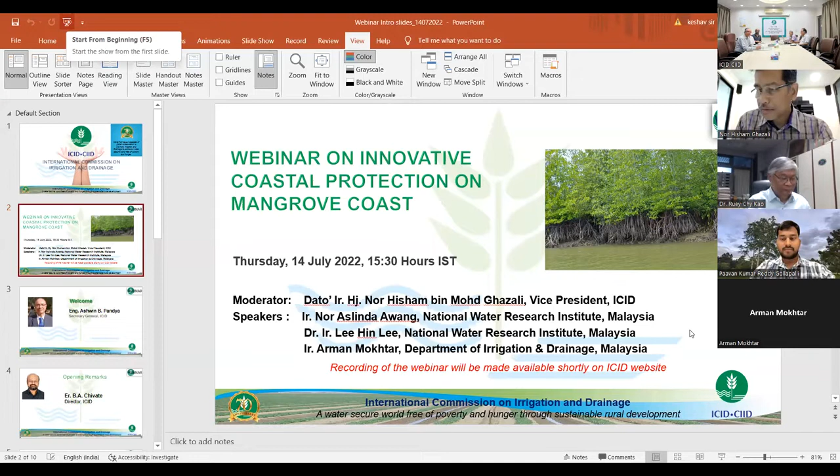So welcome to the ICID webinar on innovative coastal protection on mangrove coasts. This is a very important and very relevant webinar, especially when we are fighting with the climate change and the related issues of coastal erosion, as well as the disasters like tsunami, etc.

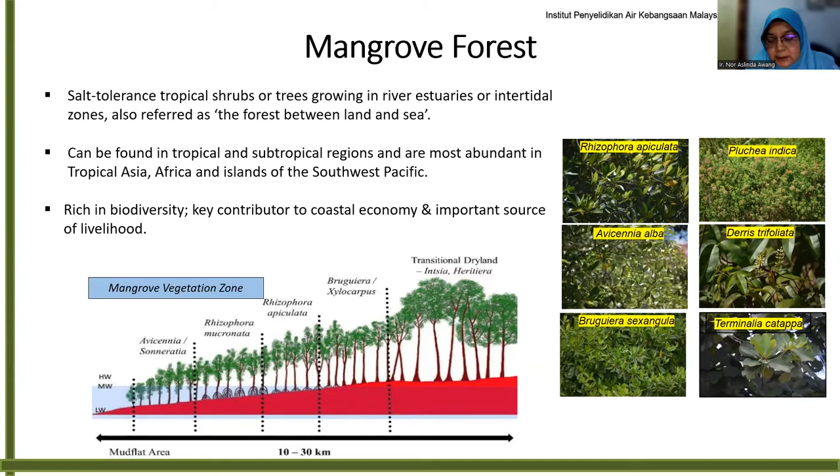Mangrove forest is salt tolerant tropical shrubs and trees growing in rivers, estuaries, and the intertidal zone, also referred to as forests between land and sea. They can be found in tropical and subtropical regions and are most abundant in tropical Asia, Africa, and islands in the Southwest Pacific. They are rich in biodiversity, a key contributor to the coastal economy and an important source of livelihood. The figures show the mangrove vegetation zone where different species of mangrove normally grow, and the most common are Rhizophora, Avicennia, and Bruguiera.

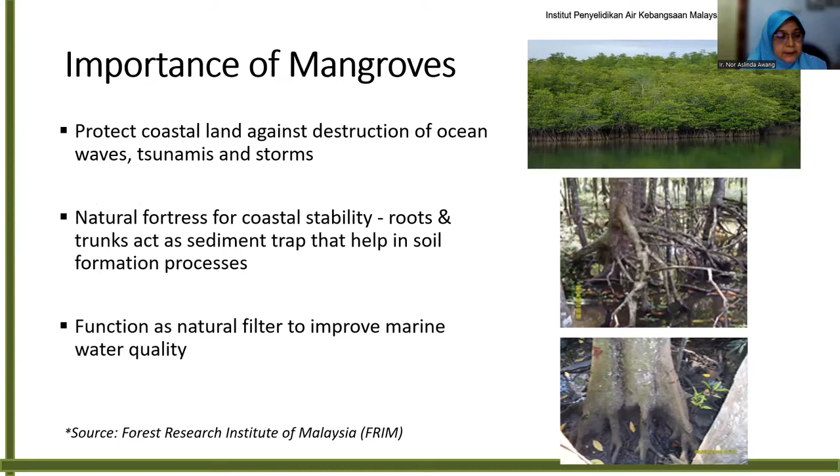And the importance of mangrove: they protect coastal land against destruction from ocean waves, tsunami, and storms. They are natural fortresses for coastal stability because their roots and trunks can act as sediment traps and help in soil formation. They also function as a natural filter to improve marine water quality. They play a unique role in ecology and biology, such as supply of timber and water storage, and provide nurseries and habitat for fisheries, prawns, and many species. And they also promote ecotourism.

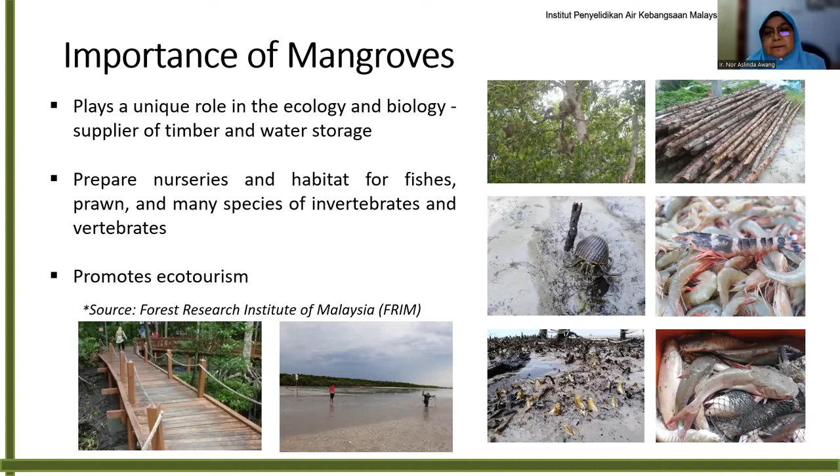Another important point is they are a significant carbon sink in the coastal environment, storing the highest biomass carbon compared to other forest types around the world. So in monetary value, mangrove forest conservation could provide a profit of USD 300,000 per kilometer. And another study found that mangrove forest can provide ecosystem services valued at USD 200,000 to 900,000 per hectare, depending on location.

A socioeconomic study in Salabat Mudflat Nature Reserve, Sarawak estimated income from fisheries of more than 56,000 USD per month. And the area, 199 hectares of mangrove forest there, can generate approximately 3,400 USD per hectare. Another study on economic evaluation at Kuala Perlis Forest Reserve in Peninsular Malaysia estimated income of approximately 75,800 USD per hectare, and the estimated total value of the forest is about 3.2 million USD for 42 hectares.

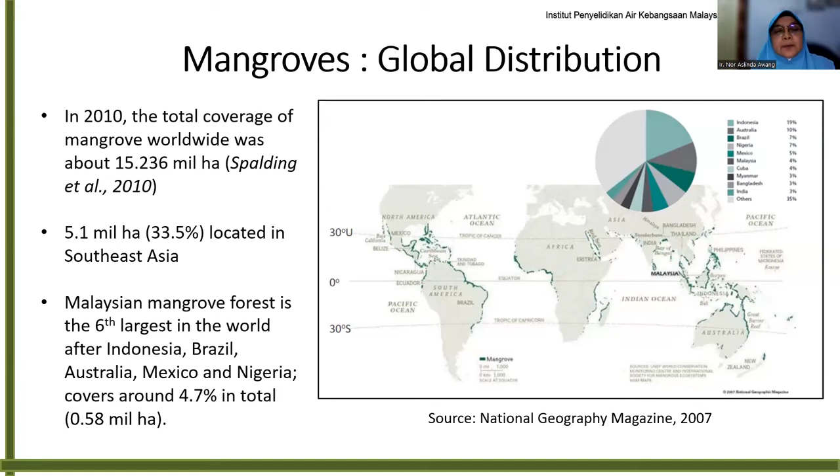Sorry. Okay, global distribution. In 2010, Spalding et al. found that the total coverage of mangrove worldwide is about 15.2 million hectares, and 5.1 million hectares is located in Southeast Asia. Malaysian mangrove forest is the 6th largest in the world after Indonesia, Brazil, Australia, Mexico, and Nigeria. It's about 0.58 million hectares.

So the latest study in 2017, by Hamdan from the Forest Research Institute of Malaysia, using satellite remote sensing, found that we now have 629,000 hectares, where 18% is in Peninsular Malaysia, Sarawak is about 22%, and another 60% is in Sabah.

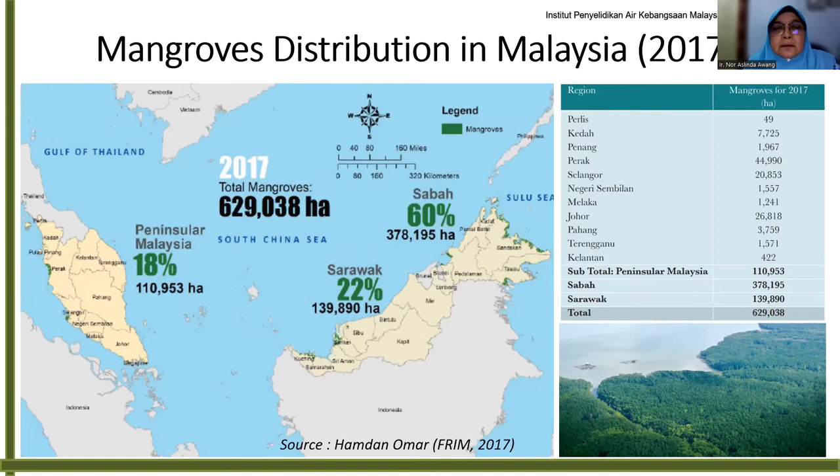So, threats and challenges. The global mangrove has experienced net loss as a result of human activities and nature. According to FAO, the Food and Agriculture Organization of the United Nations, the global mangrove area decreased by 0.5 million hectares from 1990 to 2010. The human activities are such as land conversion, over-harvesting, pollution, and sedimentation. In Malaysia, land conversion is the main threat.

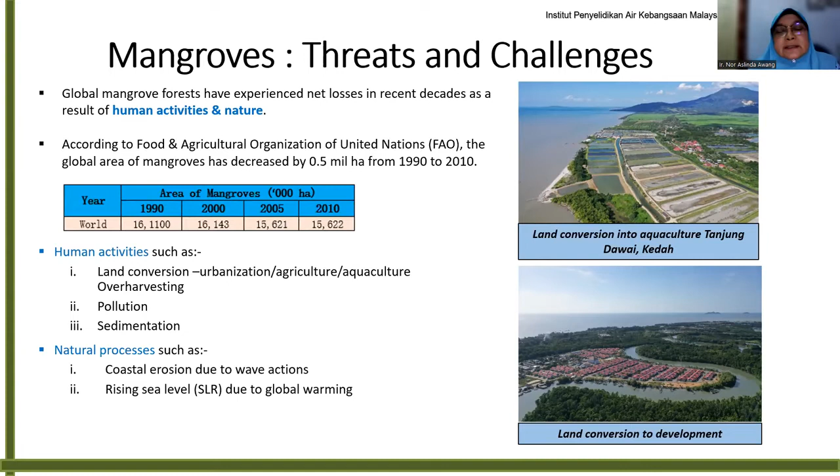The natural processes are such as coastal erosion and rising sea level. For coastal erosion in Malaysia, in 2015 the National Coastal Erosion Study was revised, and the total length now is about 8,840 kilometers, because they include the islands now, about 40 islands around Malaysia.

The erosion rate was categorized into 3 categories. Category 1 is critical or high, with an erosion rate of more than 4 meters per year. Category 2 is significant, with an erosion rate of 1 to 3.9 meters per year, and category 3 is acceptable, with an erosion rate of less than 1 meter per year.

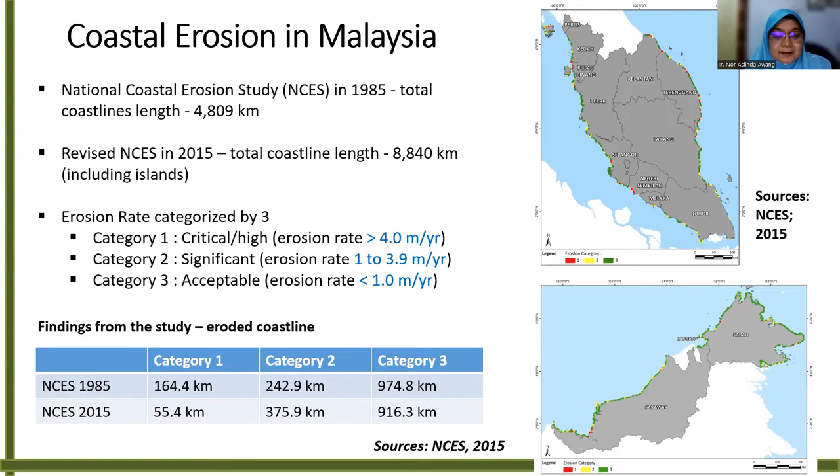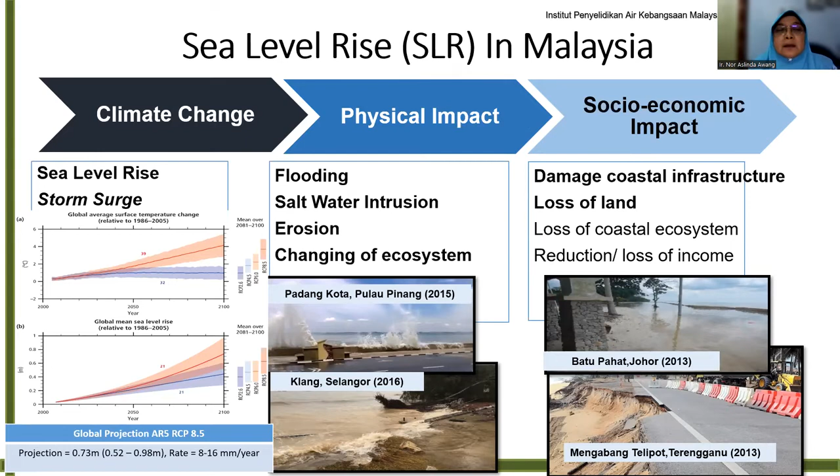We also studied the inundation area in Port Klang to see the impact of sea level rise on mangrove areas. Sea level rise causes changes in inundation duration, level, frequency, velocity, wave height, type of sediment, and salinity level, which may lead to plant death.

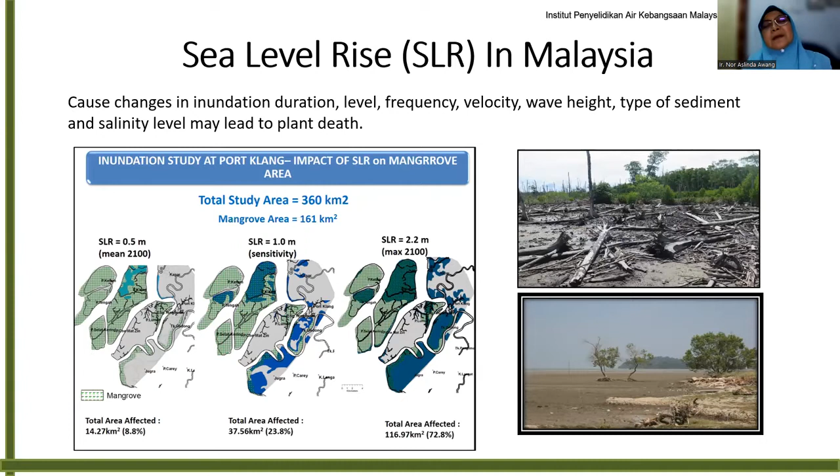A sea level rise of 0.5 meter can affect about 14 square kilometers of mangrove, while a sea level rise of 1 meter will affect about 37.5 square kilometers. If we take the maximum value of sea level rise of 2.2 meters, the total affected will be 116 square kilometers. This shows that mangrove area will decrease in the future.

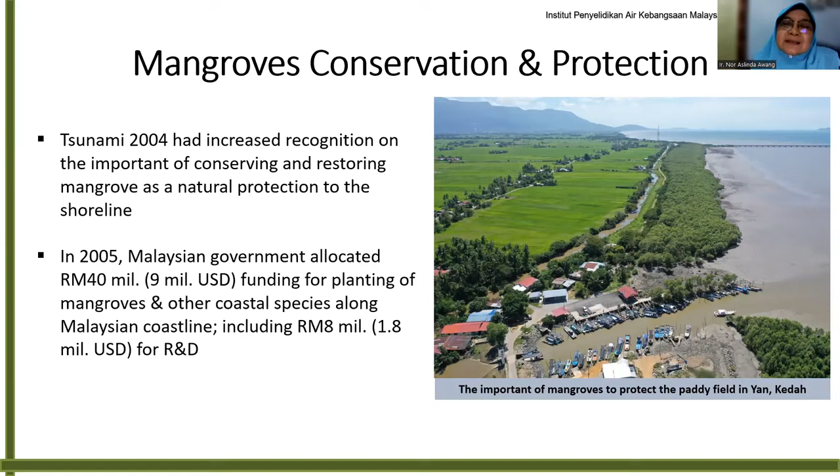In the effort of mangrove conservation, the 2004 tsunami increased recognition of the importance of conserving and restoring mangrove as natural shoreline protection. In 2005, the Malaysian government allocated about 9 million USD for planting mangrove and other coastal species along the coastline, with 1.8 million USD for R&D. For other coastal species, because of the sandy coast, we also have to protect them, so we plant casuarina and other species suitable for that area.

Mangrove planting needs knowledge and skills. Not all planting projects are successful. We need information on soil condition, monsoon season, and hydrodynamic parameters, which is crucial before planting takes place. The best planting time is after the monsoon, in areas with low wave and current impact.

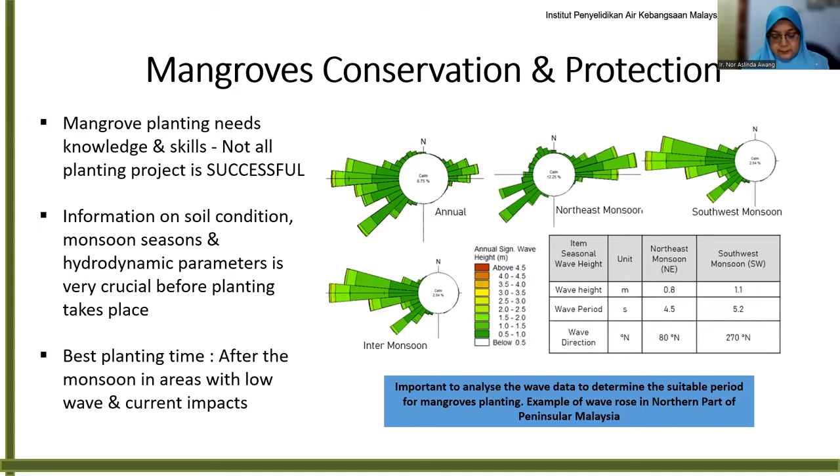So Dr. Lee will speak more on the R&D which we have carried out for mangrove conservation later. So other than R&D, we also built more nurseries to enhance the seedling productivity, and in some problematic areas, we did mangrove replanting using innovative techniques such as COMMAT and COMPILO.

Aslinda, I will allow you 2 minutes more to conclude. Okay, just 2 slides more. Okay.

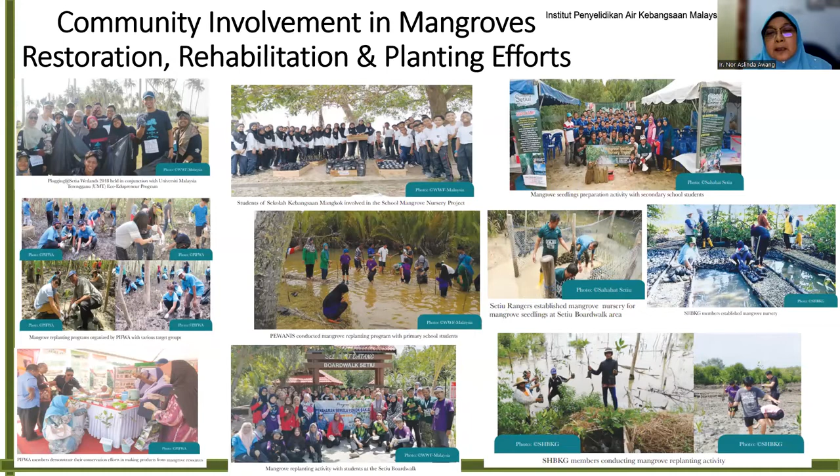Community involvement in mangrove restoration, rehabilitation and planting effort is also crucial in conservation of mangrove. So we involve the school children, private companies, government officers, and also villagers to participate in this planting program. And the NGOs have their task in the effort to conserve the mangrove. They help these awareness programs, such as the Malaysian Nature Society.

They show the children how to do the nursery, and Global Environmental Center in planting the mangrove, and rural citizens in Kedah did a lot of awareness for school children. Wetlands International created nurseries for seedlings, and also World Wildlife Fund in Terengganu, they have a lot of programs to encourage school children in replanting of mangrove. This PIFWA is Penang Inshore Fishermen Welfare Association.

They have contacts from private entities and also foreign visitors who have interest in preserving mangrove, and they invite all foreigners to come and help them to plant the mangrove. So with that, thank you.

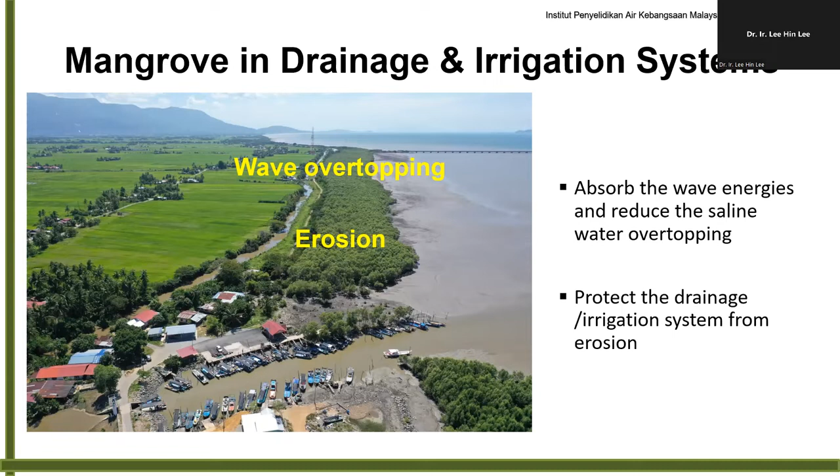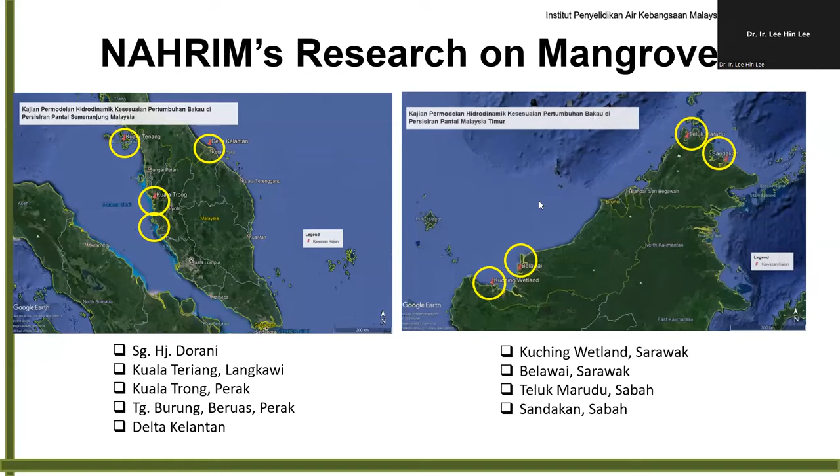Okay. In general, we have carried out the R&D research, and also we carry out some consultancy jobs. So from all the R&D and the consultancy research, there are a few things when we talk about planting the mangrove. If we want to make sure that mangrove can be sustained in good condition, mangrove likes to be in conditions where the current speed is less than 0.3 meter per second. It means that if the current speed is less than 0.3, then they can grow very well.

But besides this current, they are also affected by the wave. If the wave height is more than 1 meter, it means that this wave height will be causing some forces, and this will bring erosion to the mangrove. So the second condition is the wave height must be less than 1 meter.

In general, we can say that we want a calm area at the particular site so that when we have a mangrove, we want to make sure it can be sustained for a longer time. The calm area, in terms of the wave itself, must have about 50% calm conditions. Also, when we talk about mangrove, they need to have a lot of suspended sediment.

It means that it's 150 milligram per liter. If we have more than 150 milligram per liter of suspended sediment, then they can become better. And another condition is they must not be in areas of eroding beaches.

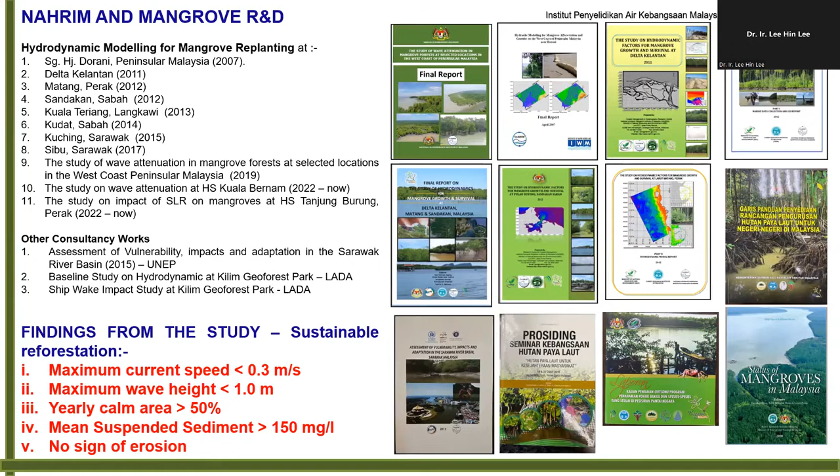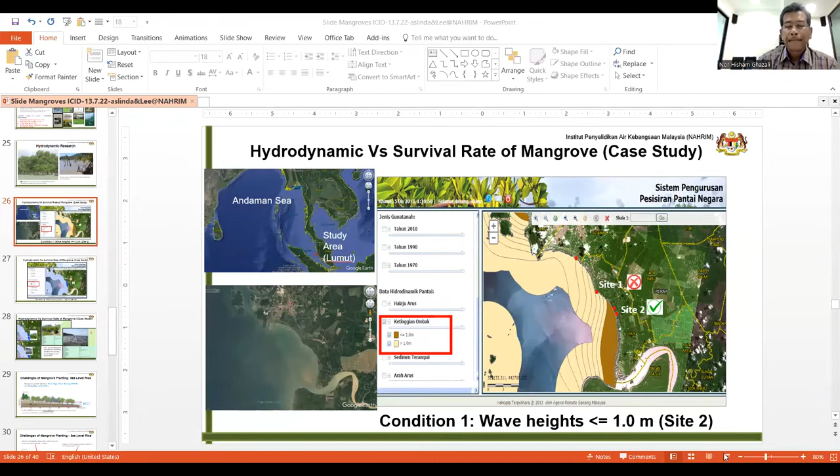Can Datuk Hisham see it, Datuk? Yeah, can see. Just proceed. Okay, now, yeah. Can you go to full screen? Down at the bottom, you can find it. Where is it, full screen? It's down in the bottom right corner, near the slide bar, next to the negative and positive icons. Can you see? You can also get it on top of the screen, on the left side, under view. You can go to slideshow. I stop again. So you're okay? Just go to slideshow. All right, okay. I cannot go to the slideshow. I don't know why. Okay, slideshow. Yeah. Is it all right? Yeah, okay, all right, okay.

So now I would like to show the case study, actually how important it is before we do the planting. We have to know a few things, because from a series of analyses carried out, when we don't study the proper hydrodynamics at the planting site, then we lose a lot of money on that.

For example, there's a study, like what Aslinda mentioned, where most of the stretch has sandy, muddy beach, very near to what we call the Sungai Perak area. So we carried out the wave analysis and we found out.

If we look here, the brown color means the wave is less than 1 meter, whereas the light brown one will be more than 1 meter.

So from here, if we compare two sites, site 1 and site 2 - this result is from the numerical model - what we found is that site 2 complies with the hydrodynamic conditions we mentioned just now. Their condition has less than 1 meter wave height, meaning it complies with the condition for having mangrove.

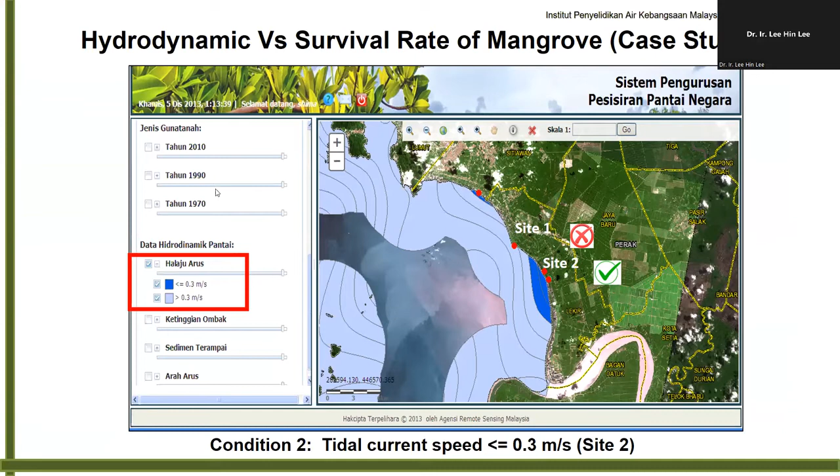So if in general we see site 1 and site 2, these two conditions, what we found is that site 1, because they did not comply with the conditions we just mentioned, all the planting exercise, the mangrove seedlings, all gone because they have a higher current speed and higher wave height. No mangrove can survive in this area, which is very close to the northern side of the Strait of Malacca.

They planted this mangrove to protect the shoreline from tsunami in the future. But the one planted at site 2 grew out very well, about 95% of the mangroves survived. So this is very important when we want to do the planting.

It doesn't mean we just want to plant in an area because we look at it being a muddy coast with muddy conditions, and the area looks very calm. We do know that the condition changes throughout the year, because we are controlled by the tidal forces, by the wind, and other things. So the hydrodynamic condition is very important, so that the money we use won't be wasted, because the mangrove will go away if we don't have a proper understanding of hydrodynamics at the site.

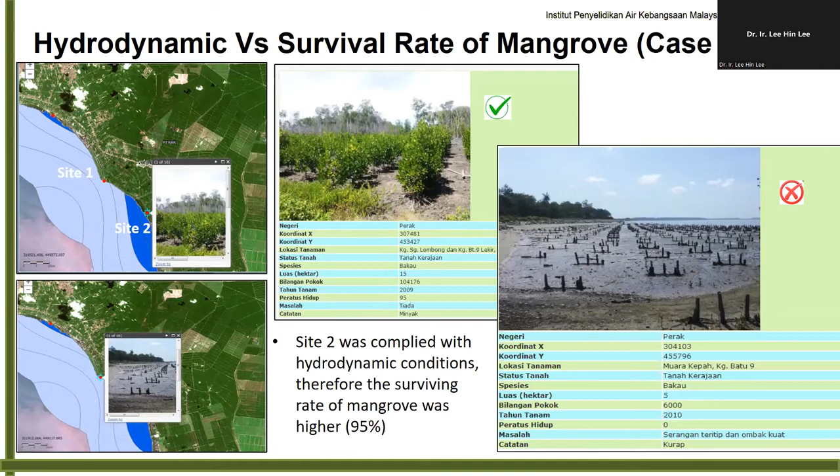Same thing when we talk about sea level rise in these global warming times. We know mangrove can grow well in the condition from the mean sea level until the mean high water spring. If we look at this area, due to different salt concentrations, they have different kinds of mangrove. As they go further inland, they have the ones with lesser salt tolerance. Under this condition, nowadays we have a very big range of mangrove, because our mean sea level and mean high water spring allow the mangroves to grow in that condition.

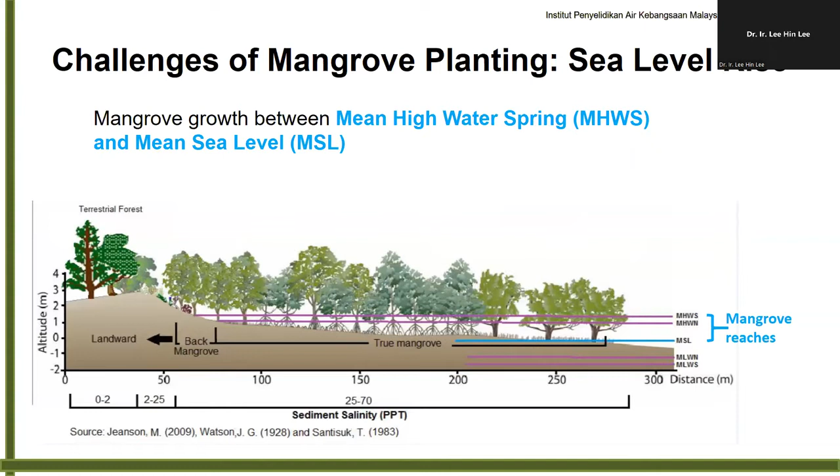But when we talk about sea level rising, it means my mean sea level must plus a certain height, let's say about 1 meter. It means the mean sea level is going to be higher. Same thing for the mean high water spring, it's also going to be higher.

So as a person who wants to protect the hinterland or our terrestrial area at the site, we have to protect this mangrove. How do we protect this mangrove? We need to have other structures, we have to make sure that the soil level is increased, so our mean sea level won't be so high there. There is another technique that's supposed to be applied in the R&D.

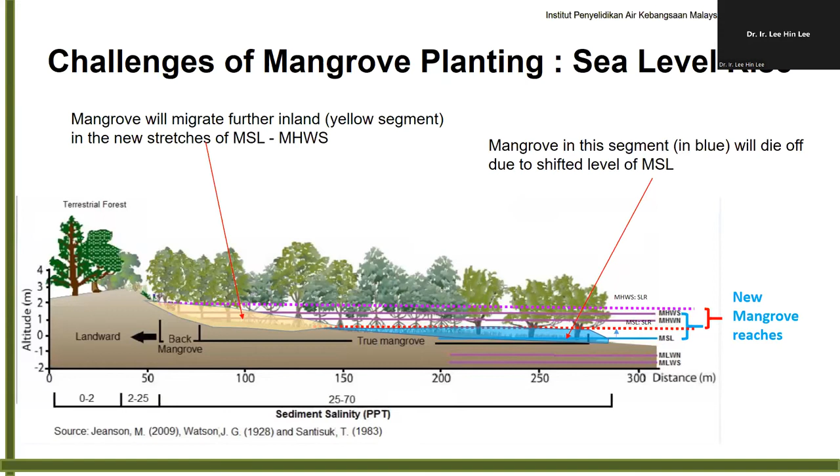So what we can say as a sub-key finding here is that mangrove plays a vital role in protecting the drainage and irrigation system from erosion and wave overtopping. This is very crucial, because when we talk about paddy planting, normally they are in very low areas and very near to the shoreline. So mangrove can help farmers reduce their problems from wave overtopping and erosion.

But mangrove can only grow well under these certain conditions. So if the site is unable to fulfill this condition, we need some support. Some soft or hard protection is needed to reduce the energy, to get the mangrove to grow well.

So we will see how Malaysia carried out this study. Actually, Nahrim is the one that, knowing our shoreline especially in the Strait of Malacca was attacked by the tsunami in the year 2004, recognized that planting mangroves is one of the important things for us. So Nahrim carried out the numerical model hydrodynamic analysis, to assist the forestry department before they carried out the replanting.

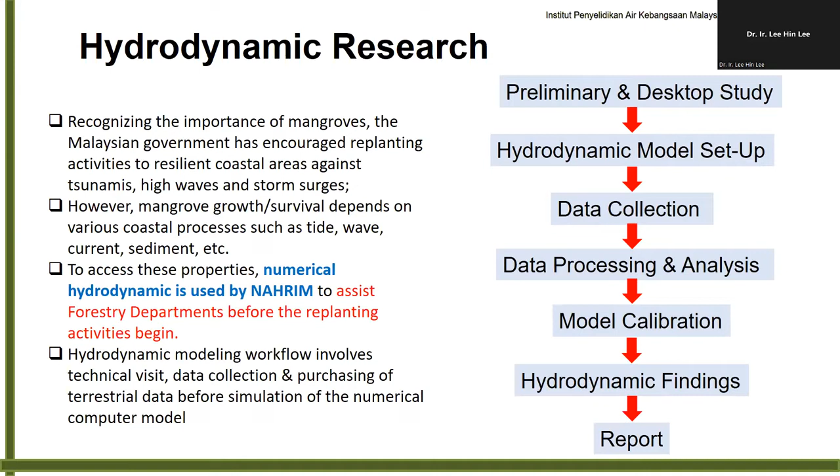To carry out the numerical model, a series of jobs had to be carried out: data collection, data processing, modeling, calibration of hydrodynamics, and only then could we come up with findings on the hydrodynamic conditions at the site within 1 or 2 years' time.

We need to use this current speed result to calibrate our model, to come up in the future with projections for northeast monsoon, southwest monsoon, inter monsoon, with wave and without wave. All this exercise has to be carried out before we can advise the forestry department on how to apply the protections.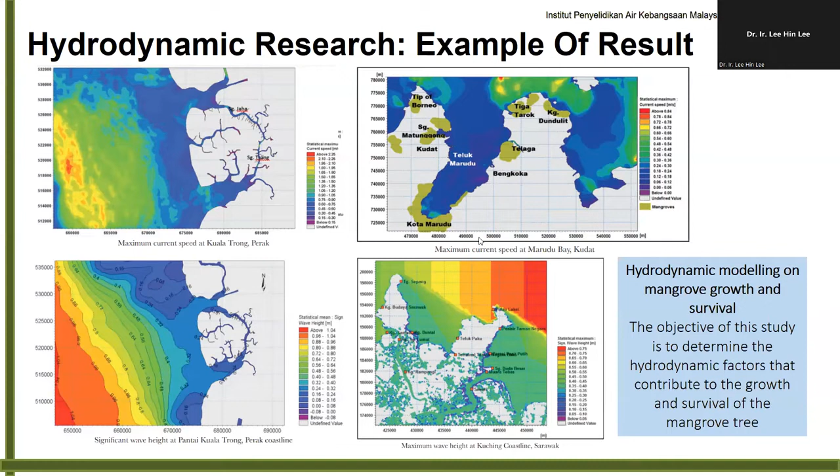So this is some of the results - hydrodynamic results to help the mangrove planting committees carry out their job. This is one example, also very near the site at the Strait of Malacca, where we carried out a hydrodynamic study on where to put the geotube. Geotubes are big but easy to place a little offshore, so we analyze how high the geotube needs to be at the site. DID will carry out the installation of the geotube.

Another thing is we use structures like revetment construction. This revetment reduces and breaks the wave energy, because mangroves themselves don't mean the shoreline will be stable. No - mangroves also depend on hydrodynamics. If we have higher hydrodynamics, the mangroves will die off. So to protect them, we need some structures, not high, like revetments, that can protect the mangrove from further degradation from the shoreline, or other similar structures.

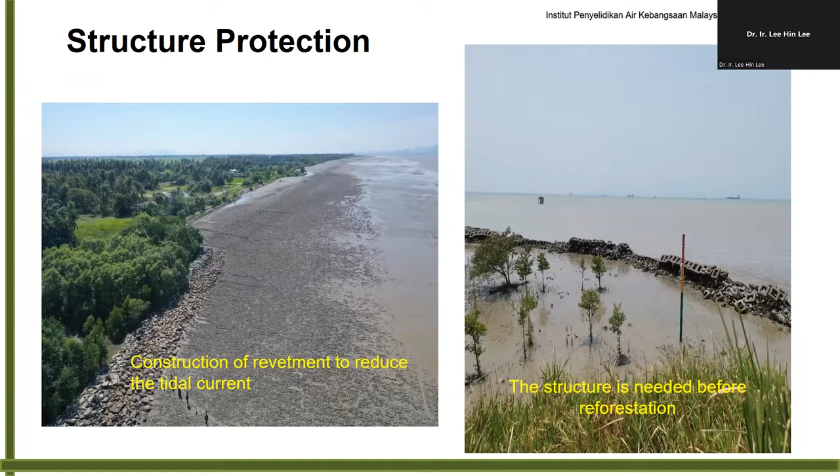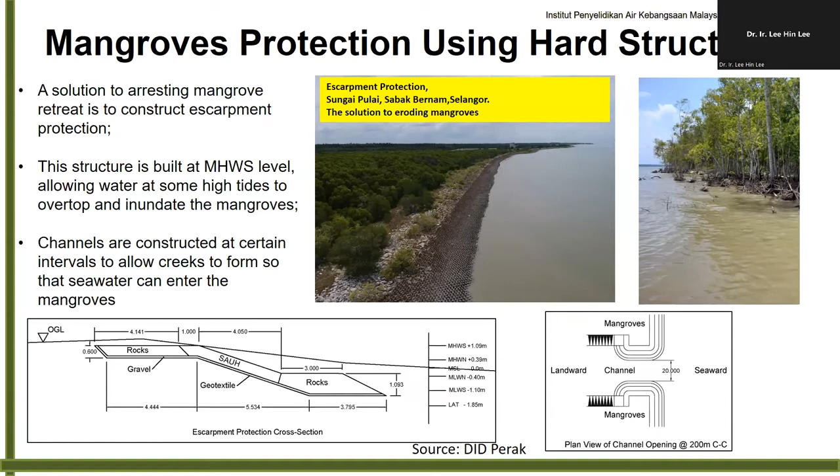Or other structures like the escarpment along the shoreline, where we provide channels in between the escarpment to let the salt water go inside the mangrove to let it survive. There are a few other structures we can apply when doing this.

So the finding is that mangroves are very important because they protect the drainage and irrigation system. Mangroves can grow well under certain hydrodynamic conditions, but appropriate adaptations are needed - hard or natural-based solutions - to protect degraded mangroves. Research and development activities, especially understanding hydrodynamic conditions, are needed before undertaking any mangrove restoration, so at least we can reduce the losses we will face in the future. With that, thank you very much.

Thank you very much, Dr. Lee, for your detailed presentation on the efforts we have undertaken in Malaysia on restoring mangrove forests and our attempts at replanting mangroves on open coast.

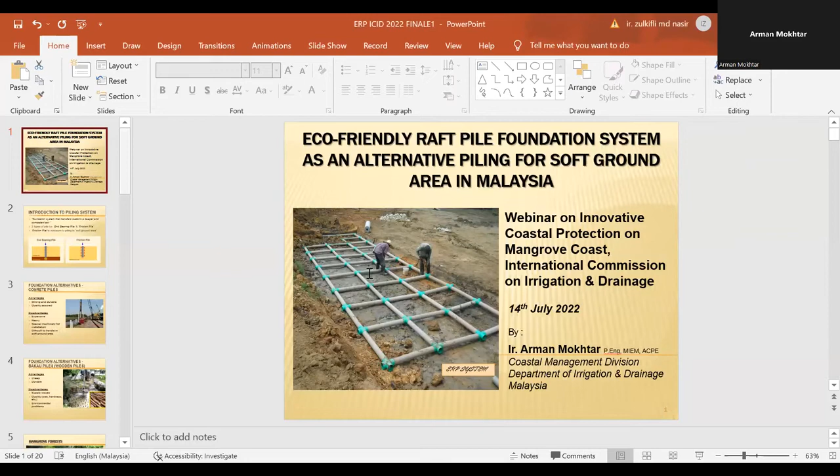Thank you very much, Dato'. Can you hear me, Dato'? Yes, we can hear you. Okay, thank you. Share your screen. All right. Okay, Tok, shall I start?

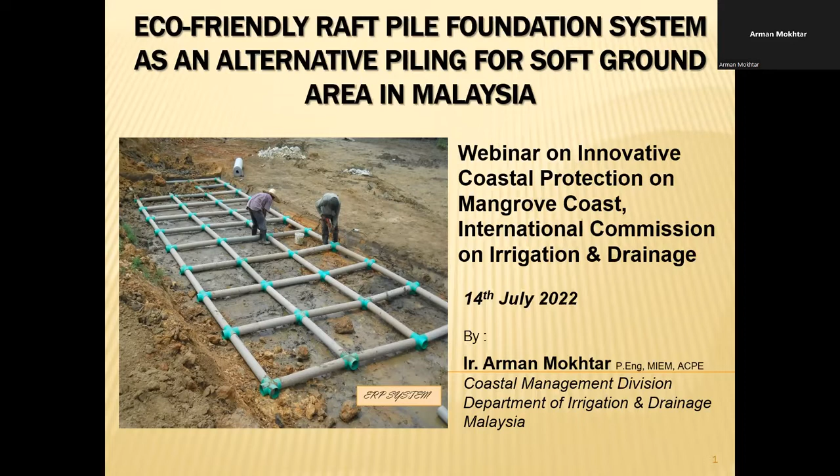A presentation entitled Eco-Friendly Raft Pile Foundation System as an Alternative Piling for Soft Ground Area in Malaysia. Let me introduce the piling system normally used in soft ground areas in Malaysia. Basically, we have two types of foundation: the first is the end-bearing pile, and the second is the friction pile. The foundation system basically transfers the loads to a deeper and competent soil.

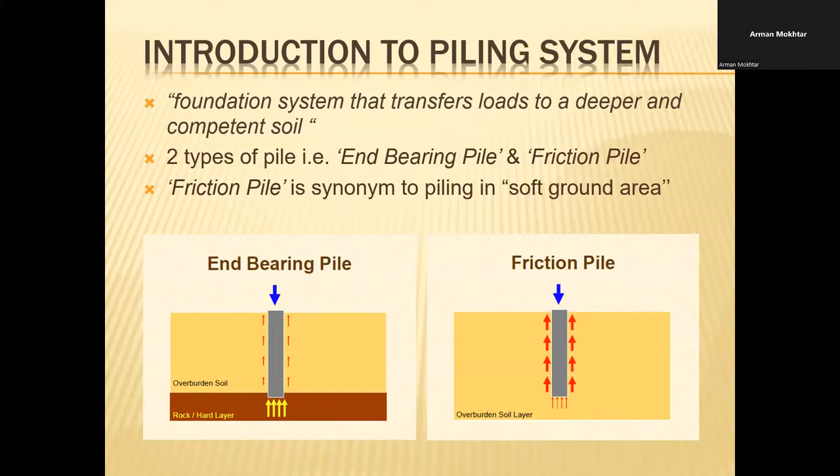So if you have a load, we normally transfer the load to the competent soil, and the problem is with the soft soil in Malaysia, we have very thick marine clay or peat, and friction pile is basically synonymous with piling in soft ground areas. Of course, we all know about concrete piles. Concrete piles are very strong and durable, and quality is assured because they're made in the factory.

The disadvantage of using concrete piles, especially in soft ground areas, is that they're quite expensive, heavy, and require special machinery for installation. Bringing heavy loads and special machinery to sites is quite a challenge for us in construction works in soft ground areas. And of course, these heavy things are quite difficult to handle in soft ground.

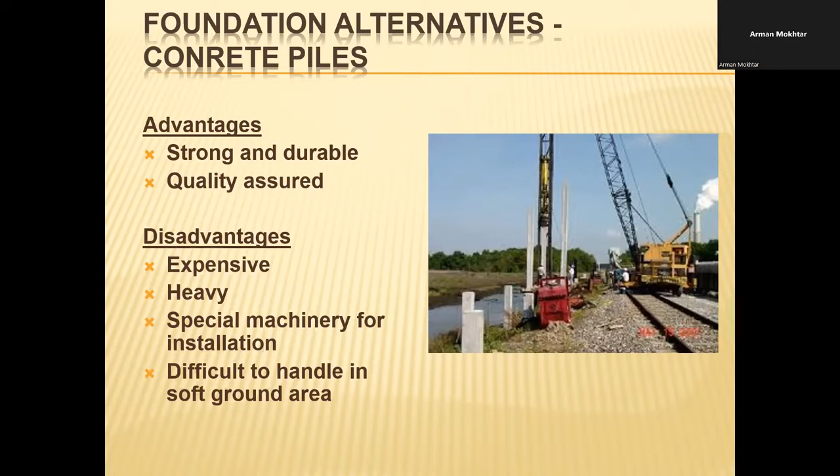The other alternative is what we call bakau piles. It's a wooden pile harvested from the mangrove trunk, and the local name for it is bakau piles. The advantage of these wooden piles is that they're much cheaper than concrete piles. And the most interesting thing is they're quite durable if submerged underwater. So people say this pile is quite durable and very cheap as well.

The disadvantage of these bakau or wooden piles is that we now have supply issues. In Malaysia, we have less and less area to harvest this mangrove, and normally we import it from other countries as well. It's also subject to quality because of the specification. In those days we needed about 4 inches of girth, and nowadays it's very hard to find that size and hardness, because it's prematurely harvested. And of course, for coastal engineers like us, it creates a lot of environmental problems and coastal erosion issues.

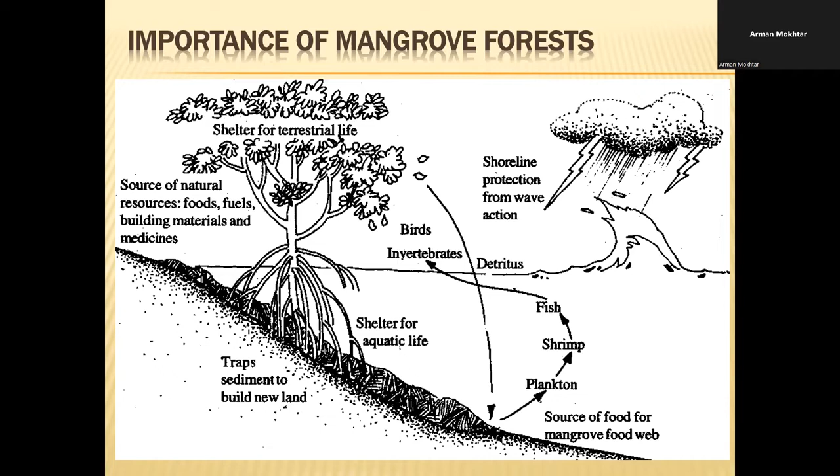This is a typical view of a good mangrove forest in Malaysia. You can see the root system plays a very important role in absorbing the wave and also harbors a lot of ecosystem in the area. I don't want to talk a lot about the environmental things, but for us the mangrove forest is very important to protect our shoreline against wave action, and it also traps sediment to build new land. So this prevents coastal erosion along our coastline.

If you look at this picture, in most areas we have a very thin layer of mangrove protecting our coastal bunds or dikes behind it. You see here a paddy field protected by a coastal bund, and that bund is protected by a thin layer of mangrove. It's very critical for us, because if we lose this mangrove area, we need another type of protection for our coastal bunds.

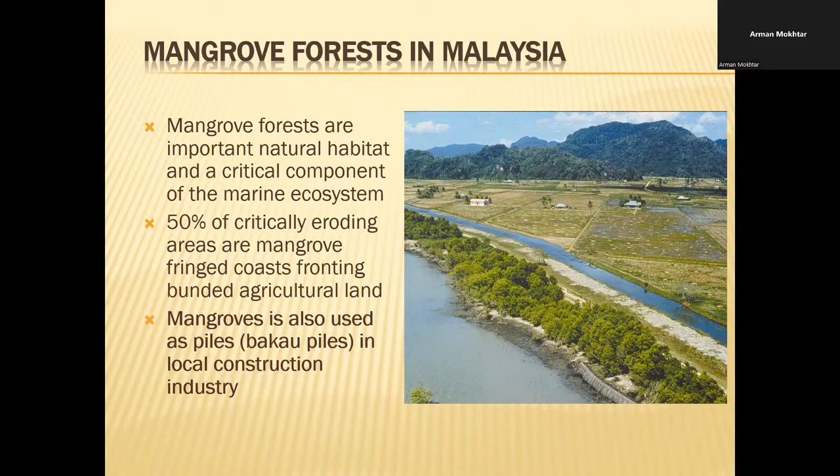And also the problem, like what I said just now, is mangrove is also used as piles in the local construction industry. So in a way, this area is also subjected to people who would like to use this as a cheaper alternative for piling as well. So this is how it looks, the wooden piles or bakau piles. It is actually used for light foundation works in construction.

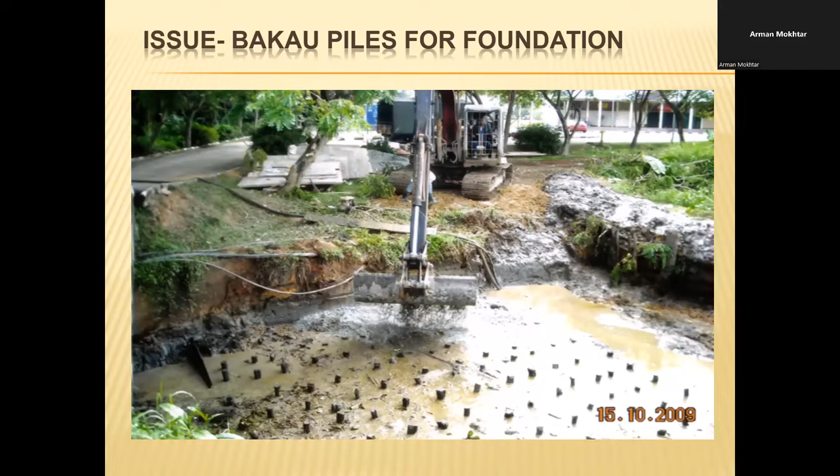And the first issue is basically we used this a lot in those days. We use this bakau in our construction industry. And the other issue is we are now actually facing a lot of mangrove deforestation for aquaculture and agricultural land. So these two issues basically create pressure on our mangrove ecosystem, and lead to degradation of the mangrove itself, and later will contribute to coastal erosion problems. For your information, the government has spent millions, 100 millions of ringgit to prevent or to protect our coastline against coastal erosion.

And if you look at the impacts of using the wooden piles or bakau piles, these are some of the values that we calculated, and I just summarize it. If you want to have 0.05 hectares of foundation area, we need to harvest a mangrove area of 1.4 hectares, which is actually 28 times the area of the foundation itself.

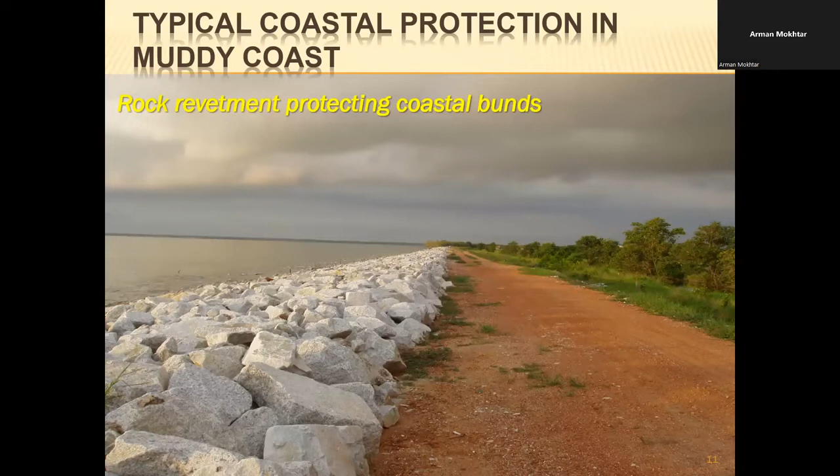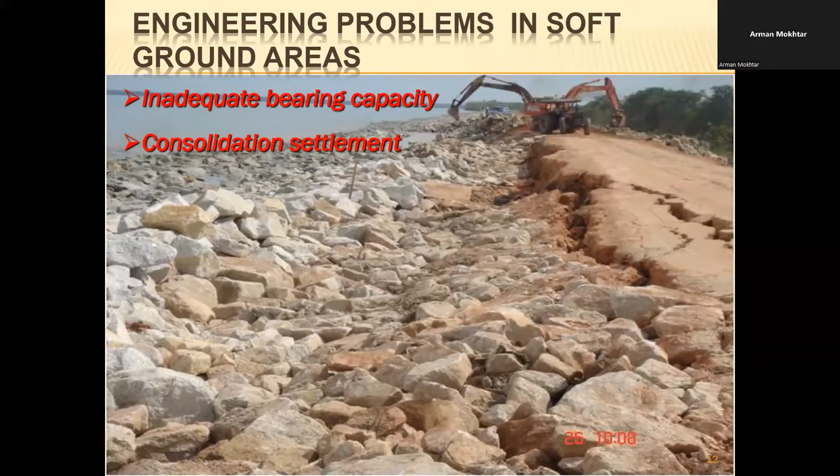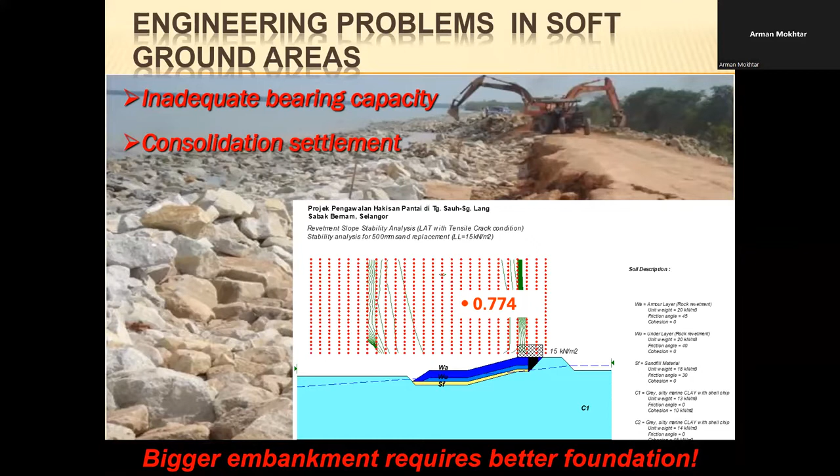So if we don't have mangrove, then basically what we need is this kind of protection. We call it rock revetments. And this is a typical rock revetment protecting our coastal bunds when we don't have bakau anymore. And the problem with building in very soft ground areas is it's also subjected to inadequate bearing capacity problems and consolidation settlement. From this picture, you can see that there are failures in the rock revetment itself when we build it on soft ground, normally because of heavy machinery and also because of the soft ground conditions. And bigger embankments normally require better foundations.

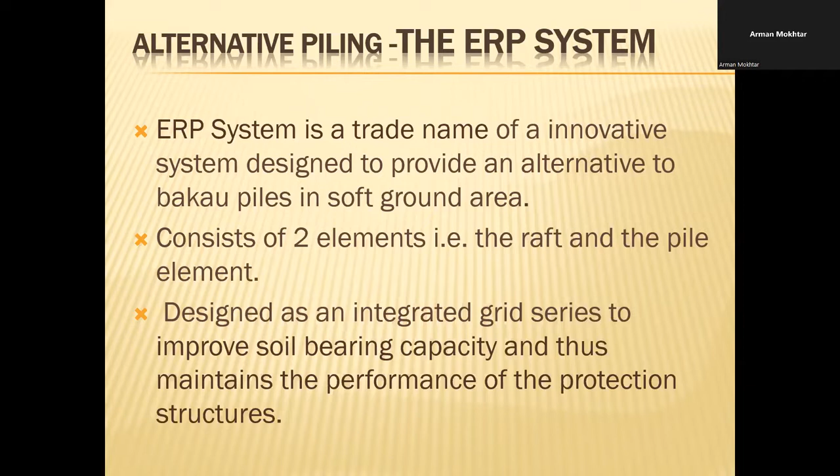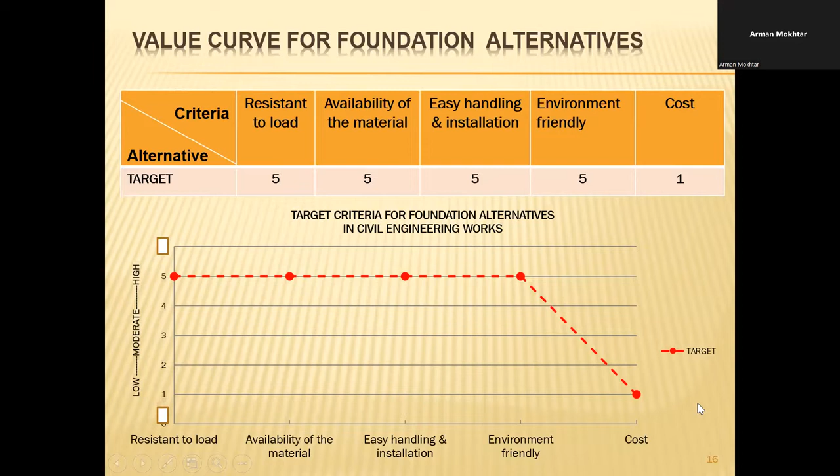Okay, Datuk. I think the last part of my presentation will be this one. Basically, we engineers like to compare things, and we normally use this value curve for foundation alternatives. We look at it from different perspectives: resistance to load, of course we need something that can resist the load, availability of material, easy handling and installation, environmental friendliness, and of course cost. If we put it in graphical form, this is the ideal value curve for foundations in soft ground areas.

And if we compare some of the alternatives, the bakau piles or wooden piles, the precast concrete piles, steel piles, micro piles, and also the ERP system, we can put some sort of rating, 5 for the good one and 1 for the lesser one. Of course, we need everything good, but very cheap as well. So this is how we table it. And if you look at the graphical form, the bakau piles or wooden piles look like this: very low in cost, but we have a problem with environmental friendliness and also availability of material.

We look at a precast concrete pile. It has resistance to load and availability of material, yes, we have all the concrete, but when we talk about handling and installation, it's actually going down, and it's also not so environmentally friendly, and the cost is moderate. If you look at steel piles, the same goes, and of course the cost will be higher than concrete piles.

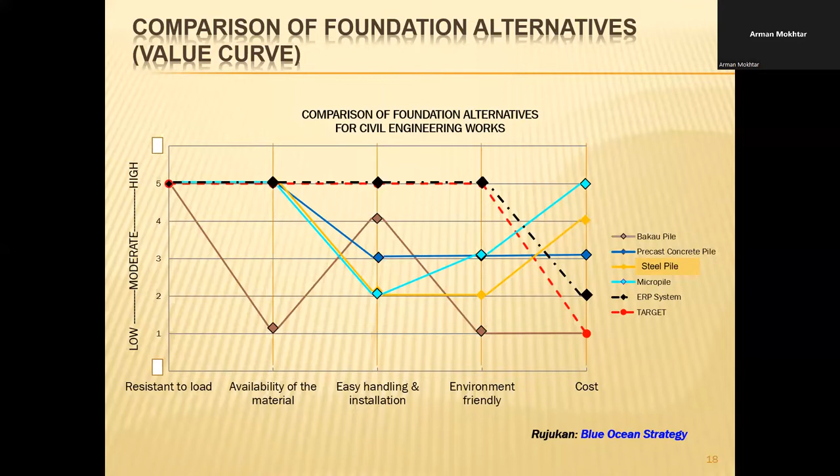If you look at micro piles, of course the cost will be higher. And if you look at the ERP system, basically we have resistance to load based on the studies. We have the availability of material because it's actually made from recycled material, such as recycled plastic and rice husk, and it's very easy to handle and install, and it's environmentally friendly. Cost wise, of course it's more expensive than the wooden pile, but it's actually cheaper than the other alternatives. So it's actually very close to the ideal value curve.

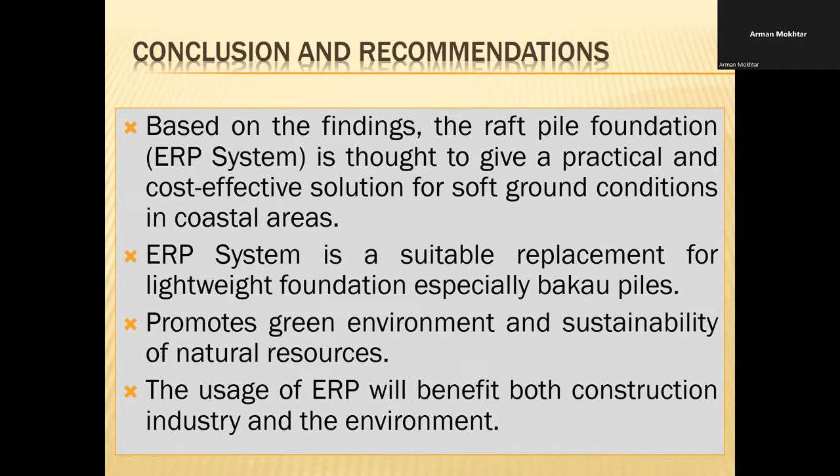So as a conclusion and recommendation, based on the findings, the raft pile foundation is thought to give a practical and cost-effective solution for soft ground conditions in coastal areas. And the ERP system is a suitable replacement for lightweight foundations, especially for bakau piles. Of course, it promotes a green environment and sustainability of natural resources, and the usage of ERP will benefit both the construction industry and the environment. With that, thank you very much, Datuk.

Thank you, Engineer Arman, for that presentation. So just to fill in some of the blanks, when we construct coastal structures on soft marine clay, which is typical of our mud flats, we are definitely guided by the height of the water level during the spring tide or the highest astronomical tide, and also by the hydrodynamics of the area. So if you are facing sea level rise and you need to raise your structure higher in order to prevent overtopping and to provide better coastal protection, you will need a stronger foundation.

And if you need a stronger foundation, you naturally have to add piles to your structure. So that is the conundrum that we face. If you build bigger structures, you need to put piles in. And in the Malaysian construction context, they would revert to using mangrove piles. So it defeats the purpose: you are trying to protect the mangroves, yet you're still using them for construction.

So this is our answer to that problem, by introducing a composite type of pile made from waste plastics and also from waste rice husk, which is normally burnt by the farmers. So we came up with this composite material to design this pile system, and we hope that it will catch on and be used in construction in the future, because we definitely have to build higher embankments in light of sea level rise, which is forthcoming.

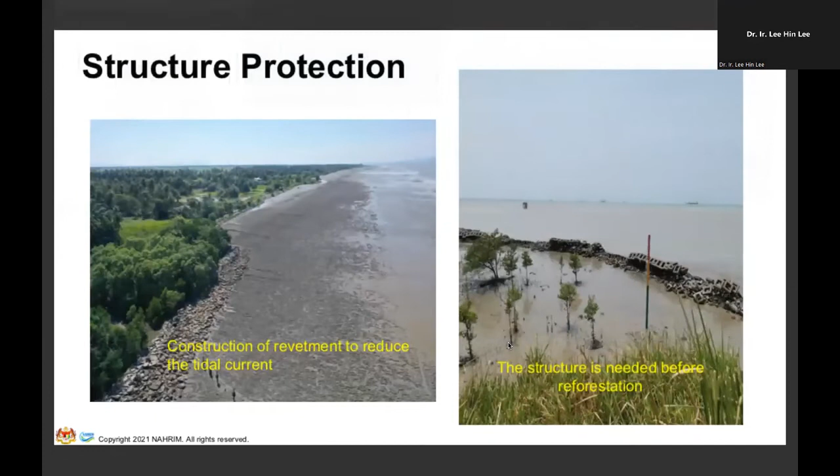Dato', if you look at this slide, where they built the geotube offshore, this area in the beginning was an eroded shoreline, because it was receiving higher current speed and higher wave height. This is why at the back of the shoreline here more erosion happened. But near this area, they have a chalet area. Back to the previous slide. This one, number 3.

So we have our geotube, and before this geotube, the shoreline was already eroded. That's why they put in the geotube. Once they have the geotube, they have reduced the current energy or the wave energy. Because the energy has been reduced, between the geotube and the shoreline the soil has piled up. More eddies happen on that side, and the sediment starts to settle down. Once the sediment settles, we can do the replanting. That is the concept. Without the structures, the shoreline erosion will still happen.

Okay. Thank you, Dr. Lee. I hope that answers it. The presence of this structure is to dissipate energy and create a calm behind the structure. There are no direct waves coming in, just waves with reduced energy. When you create a calm, the chances of sedimentation will be better, the chances of growing new mangrove saplings will be better, and you'll get greater survival rates.

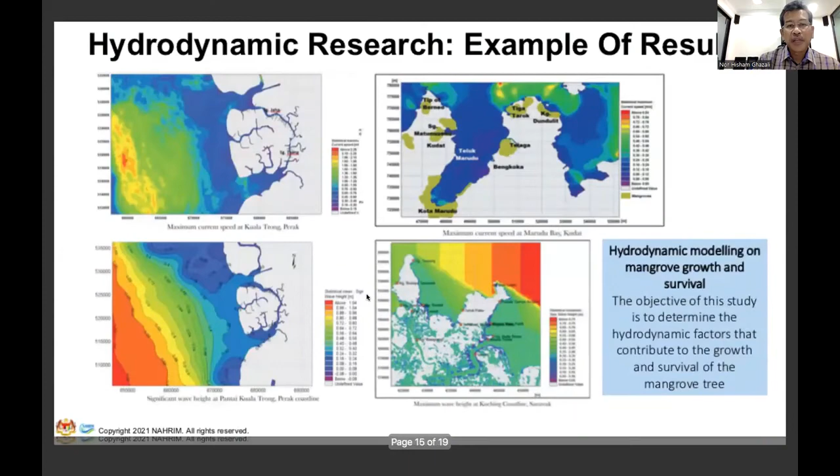And we are looking at building low coastal structures, and we also have built proper breakwaters to protect, especially in the area of Tanjung Piai that was shown earlier, in the southernmost coastline of Malaysia. I don't know whether there's a slide in this presentation. I think there was one earlier.

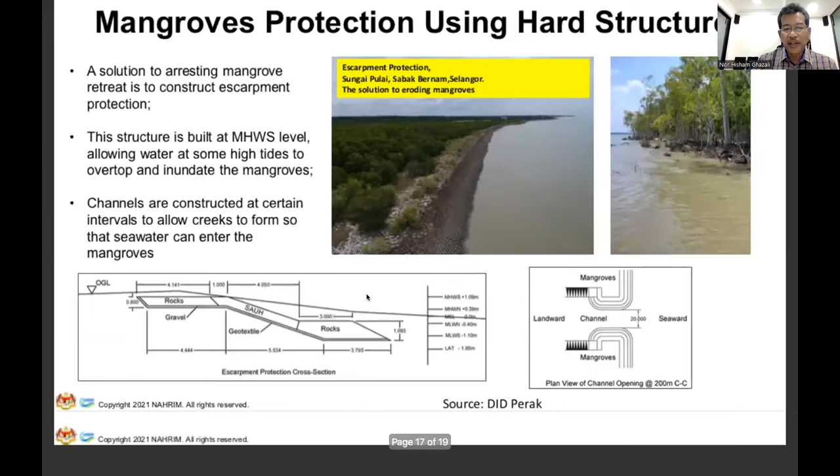Okay, I'd like to go back to the Q&A box and see, okay, how do we conserve mangrove forests? Number one is we have to really protect them in the sense that we have to control the harvesting. So not much timber is being produced nowadays from the mangrove forest. We have realized the importance of it, and most of the states in Malaysia have gazetted mangrove forests as permanent reserves. So that's the answer.

And the next question is from Madan Mohan, and it says here that salinity is one of the crucial factors of mangroves and may vary based on certain range and species, and he asks, have you done any study for different species while going for plantation? Aslinda, I think you were involved in the mangrove replanting task force. Can you answer this? Thank you, Datuk. I'm not a biologist, so this is not my expert area, but

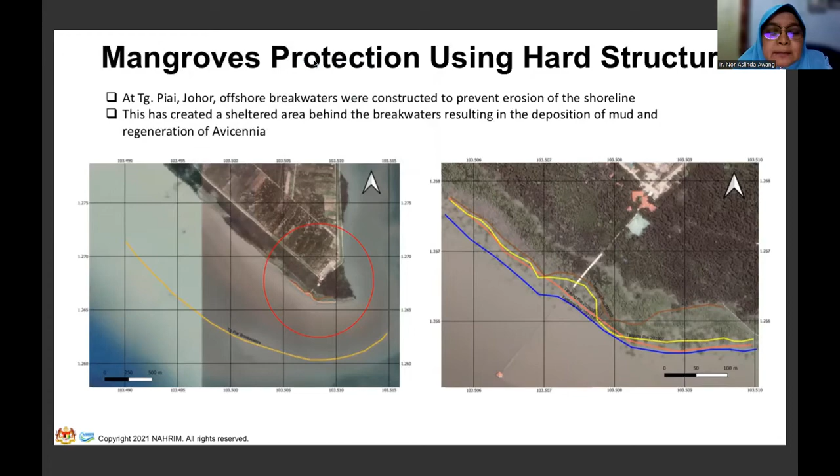Okay, thank you. Next question from Muhammad Osman from Somalia, and he asks, we would like to ask on the impact of climate change on mangrove population in Malaysia. I think Aslinda, you studied this. Okay. The impact of climate change, we have not. I mean, sea level rise is also an impact from climate change. Previously we have the projection of sea level rise along the coast.

So the plants may die off after a long time of inundation. So yeah, thank you, Aslinda.

For that question, if I can add, the global projection for Malaysia is a sea level rise of 0.73 meters until 2100. So if you prorate that, you will get 8 to 16 millimeters per year, based on the low to the high projection of 0.5 to 0.98, and on average it is about 0.73. So that is how high the tide is expected to rise in the future.

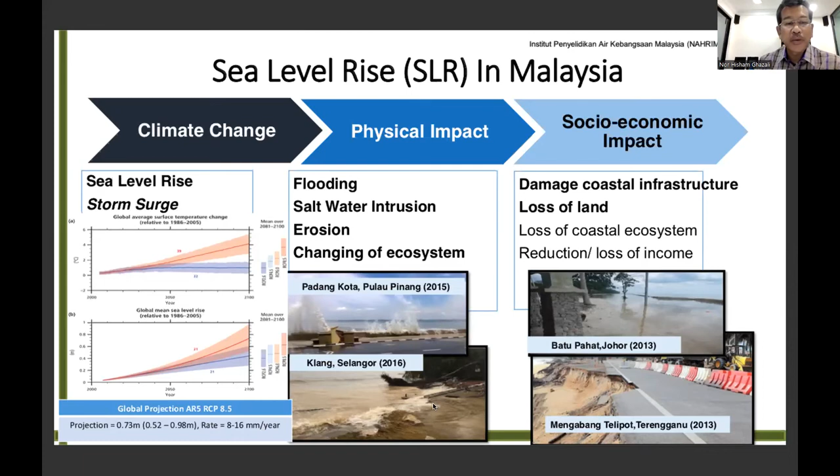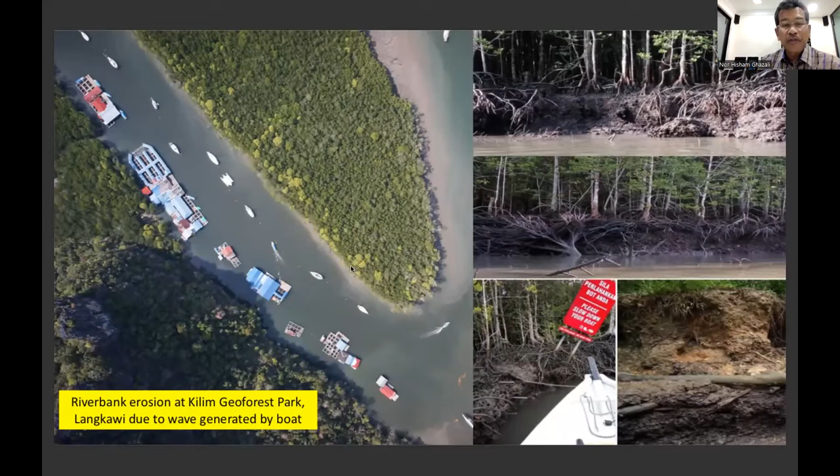So with the rising of the tide, you get more areas inundated, and flat coastlines are the ones we're seeing the intrusion of sea level inland. That's our greatest fear. If you imagine countries like the Maldives, where the highest peak is maybe 3 to close to 5 meters, the amount of land lost due to sea level rise will have a serious impact on the economies of the future.

Here I'm bringing up some pictures to illustrate. This is the southernmost tip of the Asian continent, in Johor. Singapore is just a bit more across these straits. We have marked this shoreline change, and these are all very flat shorelines. You have a steady loss of mangroves along here, and this is how we see it from an aerial view of the coastline.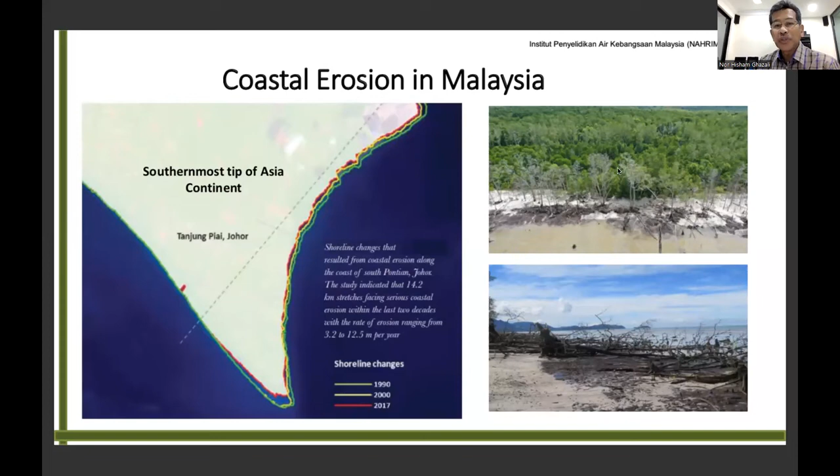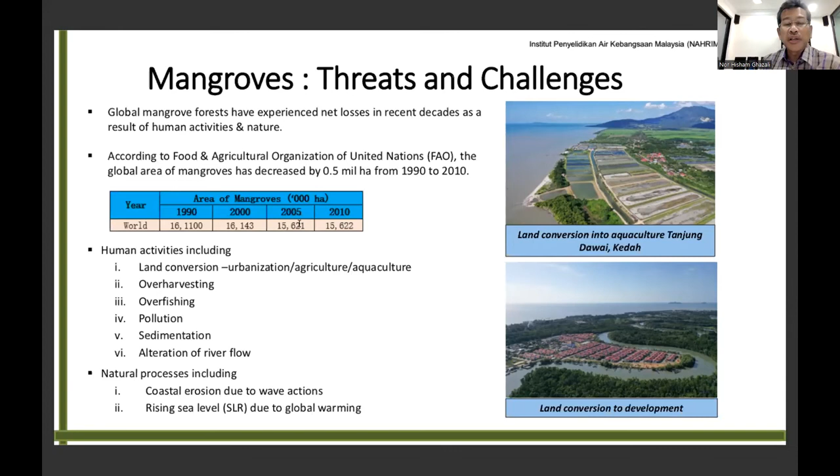Gradually, these lands here will be further eroded, and this is an area which is undeveloped. Undeveloped lands are of course not our focus when we want to put in coastal protection, but in most areas of Malaysia, immediately after the shore you have aquaculture, and sometimes further in you'll have settlements, and even further up there is planted paddy. These are the impacts of the various human activities we are already seeing, and when sea level rise actually happens, we are going to see accelerated degradation.

Mr. Yelameli asks how groundwater is contributing to the mangrove ecosystem with respect to quantity and quality. Well, like I said earlier, we have not really looked at how much groundwater affects the mangrove ecosystem, because we are basically focusing on surface water. The biggest problem in Malaysia is surface water, too much of it - we're getting 2,800 millimeters a year. Despite all that, we do have periods of scarcity, especially in major cities, basically due to pollution. But we have plenty of surface water, and a huge storage of groundwater which we have hardly exploited.

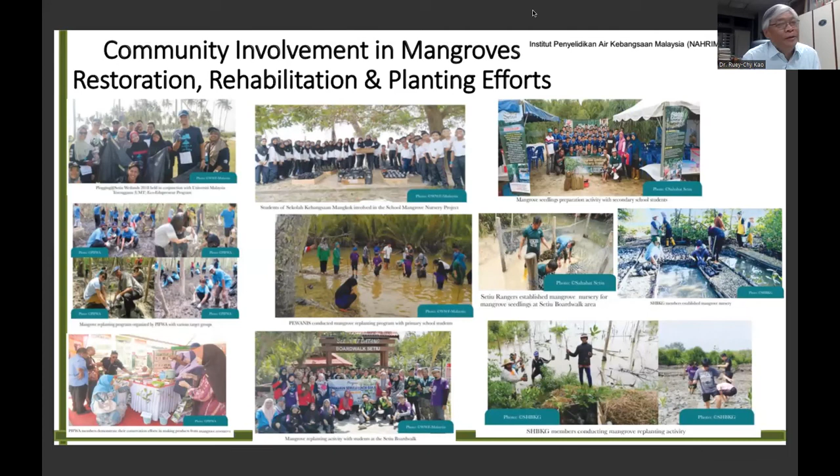Professor Kao, as chair of the working group on SDTA, any comments, sir? I think the key problem is coastal erosion. The presentation was focused on sea level rise, because that makes the shallow coastal water deeper, so wave energy becomes stronger, and erosion ability becomes more serious. So my comment is that soft and hard protection is needed to reduce energy, not only for the mangrove - before the mangrove grows up, I think the smallest coastal engineering protection is needed.

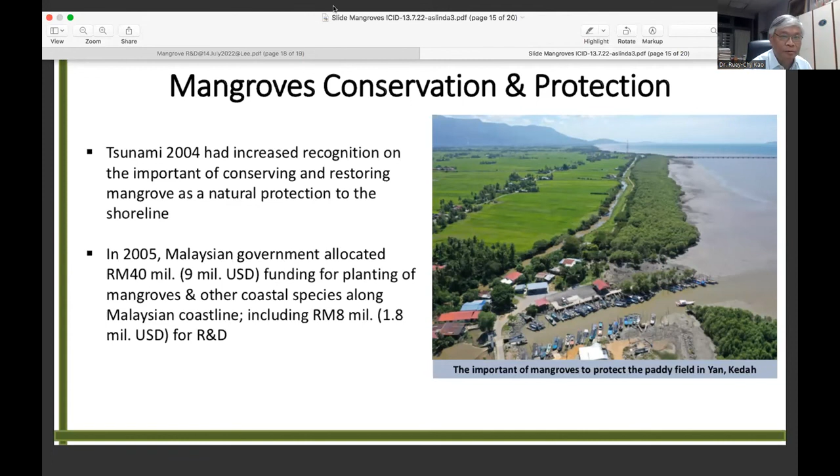Another point is trying to find the real reason for coastal erosion, not just sea level rise. Watching the presentation, I found since 2017 you have sea level rise data, but before 2017, since 1990, your records show the coastal erosion was already very serious. So before this observation data, I suggest we re-evaluate and try to find the real problem, to diagnose it and find the method to protect it.

That's my comment. After the pandemic, I sincerely invite your lab to cooperate more and exchange experience. Thank you very much, Professor Kao, for that invitation.

I definitely agree with Professor Kao's observation. The coastal areas will be immediately threatened, not only from sea level rise, but with most of our paddy areas very close to the coastline, we will face other challenges as well, especially when you have storm rainfall, high rainfall in the hinterland, coinciding with a high tide in the sea.

That is the worst case scenario we are facing in Malaysia now, and it has put a lot of pressure on our government to build proper flood mitigation systems. I guess that's all for this webinar. Professor Kao?

I have an interesting question. As you know, Malaysia is near without - it seems not a typhoon path, right? Not a typhoon path through. No. But how about the wave source - the wave source from far field to Malaysia? Where, how is the wave generated?